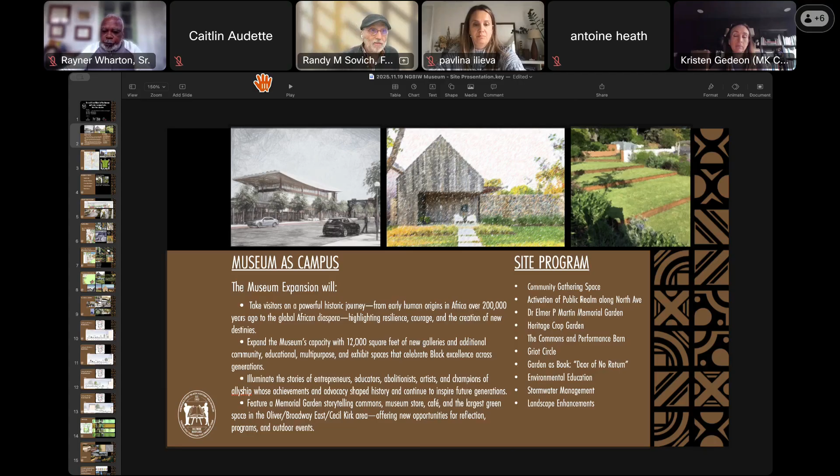The site is the largest green space in all of our Broadway Cecil area, other than the cemetery, and so we want to keep a lot of the property green and use it for storytelling for the museum purposes. The program is now being developed, and has all those things listed on the right as community program.

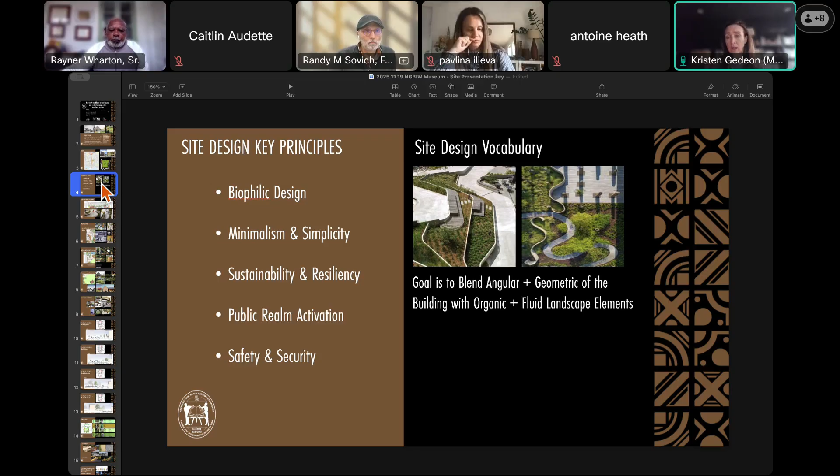So it is a blending of those two things—the more public and active spaces use that more angular type of design, and the more passive spaces on the edge of the site have those organic shapes introduced.

So we're just going to walk you through the different program elements, and then we'll do the big reveal in a couple of slides.

One thing we wanted to talk about first was obviously the public realm, and how our project interacts with what's happening on North Avenue. We really studied that in a couple of different ways. What we've done here is used those angular geometries to create large, welcoming pathways to the front entrance of our building.

So it doesn't feel like—it just feels like you're walking up a nice path to the entrance of our building. They are all ADA accessible, so no matter where you come from, you'll be able to get into our building. It's a 5% slope or less.

So we are thinking about the practical, but we're also thinking about how we activate the public realm and draw people to us. We've also set our building back a little bit, and there's landscaping in front of our building to help soften that and provide a nice grounding of the building to the site.

You can also see directly in front of our buildings, the street trees have actually been pulled back onto our site, and that's a visual cue. Usually you see street trees right along the street, but something special is happening here, so we've pulled those trees back so they're on the other side of the sidewalk.

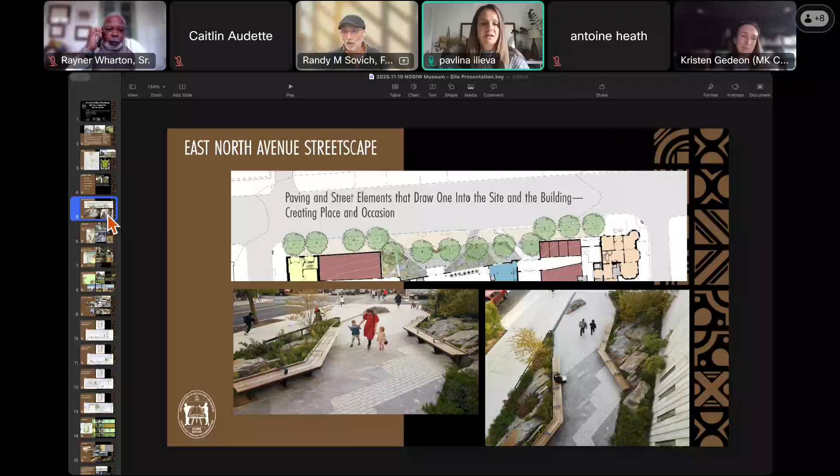But I need to understand in that next slide, because it's so zoomed in and cropped on that area of the ramps, where on the plan, on the large plan, is that? Is that towards the garden? Do you have an overall plan you can relate to?

We do. We would like to walk you through the different components of the site, and then we will show you the whole site, and then you will all be able to see how it all comes together.

And I don't want to wait to go through other things that don't make any sense. We want to have a general understanding of what areas you're showing us. So if you don't mind pulling up an overall plan, even later in your presentation, just point and say we're going to do this area, that area, and that area. That's going to help create a mental map for us to be able to follow along.

Thank you. We're showing you this area here. We're going to show you the garden, the Memorial Garden. We're going to show you the Heritage Garden, the Commons, and the Woodland Path.

Thank you so much, this is extremely helpful. In that order, I imagine, kind of the right, the left, and then below?

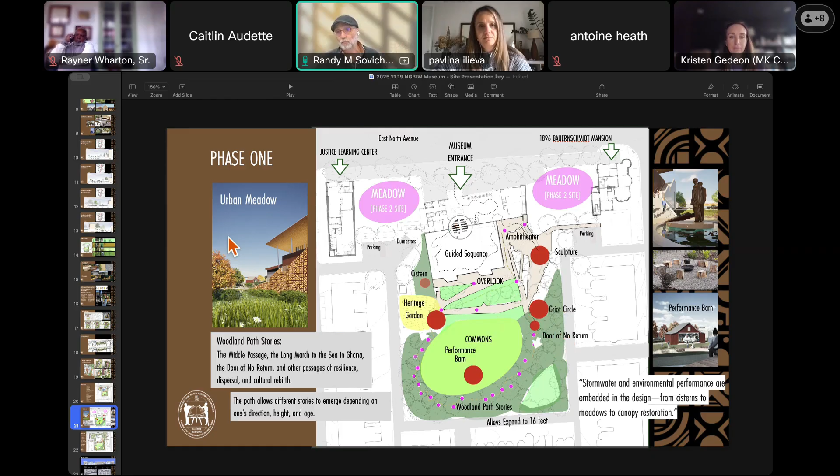So I don't know that I agree that you need to understand how it all comes together, if you just look at the different images first, which are inspirational and aspirational, things that we're also studying. You don't have to agree, I'm just telling you it doesn't make any sense.

And now that you've shown this little diagram, it starts to clarify things, so now we can follow the general areas of interest that you're taking us on. Thank you. Okay, no problem.

I could pull that up as a key, I think, somehow, but I don't know how to do it on this software. No, this was helpful, this is it, we get it. We now have a visual map of what are the areas we're going to talk about.

Thank you. Okay, do you want to cover anything else here, Kristen, before we move on? So this is a 3D massing of the garden, an idea for the garden as we're looking at it. These were inspirational images that Kristen had brought up, and we had worked together. A sculpture like this, Sojourner Truth, is something we would like to have.

The logo of the museum is two figures with a book, so we're looking at different ways a sculptor could do two figures with a book. Then the pathway down to the garden from the building is something we'll talk about in more detail.

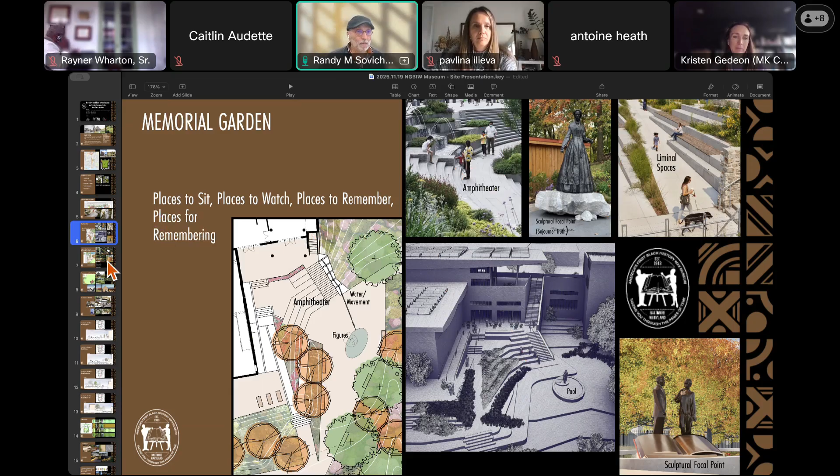But I think what Kristen wanted to cover here was the idea that there would be terracing coming from the building to the garden, how we get there and what might be in the garden, places to sit, places to watch, places to remember. I'll let Kristen do the next one.

Thank you. I'll be right back. I'm just going to get some water.

Okay, great. Kristen, just so I'm clear, the drawing on the left, is that your design? Yes, there's a rendered site plan. So on each drawing, the rendered site plan is your drawing, and all the other images are supporting the different components.

Yes, thank you. There was an idea that there would be an enlargement for that program area. This is a really exciting component of the project.

We are going to be doing some rainwater harvesting as part of our stormwater management plan, and we're actually going to be capturing it in an above-grade water structure. It's going to look kind of like a little silo.

That rainwater harvesting we will then use for what we're calling our heritage crop garden. There are maybe 8 to 10 crops that enslaved people brought with them from West Africa, and a lot of those crops actually grow here in the Mid-Atlantic.

So the idea is that in this heritage crop garden, we will be growing those types of crops so that they can talk about how those crops were brought over, how they really helped people survive, and how we continue to use those crops today.

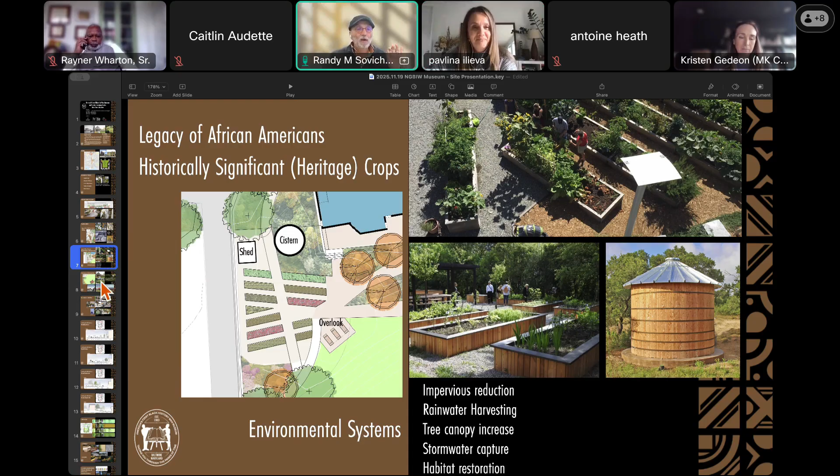One of the organizing features of this space is what we're calling the commons, a large open green space. A portion of it is sloped so that people will be able to sit on the side of it. It's meant to be this kind of large open green space in the project, in which the paths go around.

You can see that it's anchored by what we're calling our performance barn. This is going to be a 1.5-story structure that will have artists in residence perhaps in it. It may also serve as a movie night opportunity, but it's meant to be a small outdoor structure that will anchor that space and can be used for a number of different programming purposes as the museum evolves and has continuous programming opportunities.

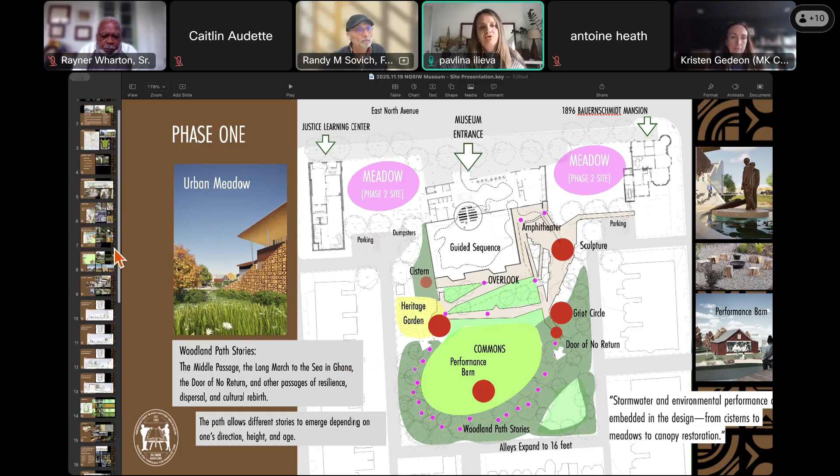Right, we were here, right before, and you were referring to this. I see at the top left corner is kind of where the garden is, and then the barn here, and I'm imagining the overlook is north of that structure, so that when we look at the render below, we're sitting at the overlook looking at the barn. Does that make sense? Correct. Okay, understood, thank you so much, I can follow the relationships now. Thank you, carry on please.

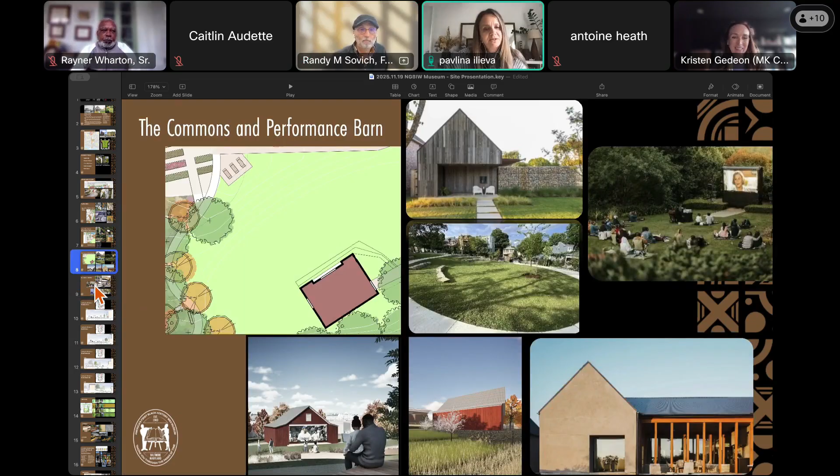Thanks, great, go ahead Kristen. Hi, thank you. So these are some site features, speaking to some of the materiality we're going to have, lots of natural wood, lots of Corten. Randy, do you want to say a little bit about the griot?

The griot is a storytelling area, and that's going to figure prominently. We're imagining maybe we'll have some tree stumps from the stump dump there so people can move around, but that's going to be a very dynamic space.

And then there is something known as the door of no return, and we want to have that program element and moment in the garden. We're doing it almost like a secret, so that's also along the pathway, a moment where we can use it to tell the story in the landscape.

There will also be a water feature, probably in the Memorial Garden area. Water is a very important element in African American culture, so we wanted to make sure that was incorporated. It's also a nice white noise to have in the background when you're in the city. The water feature is integrated into the Memorial Garden area and takes advantage of the grade change in that area.

These are some sections that we did through the site. I think these really help to explain some of the grade changes and how our site specifically relates to the public realm. The first section is through North Avenue and through the main entrance of the building, so you get a sense of exactly how the sidewalk, the right-of-way, and the landscaped area relate to how people are entering the building.

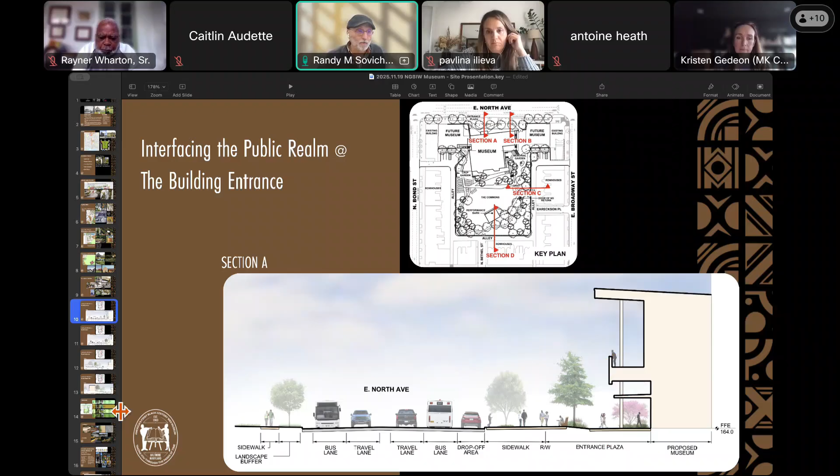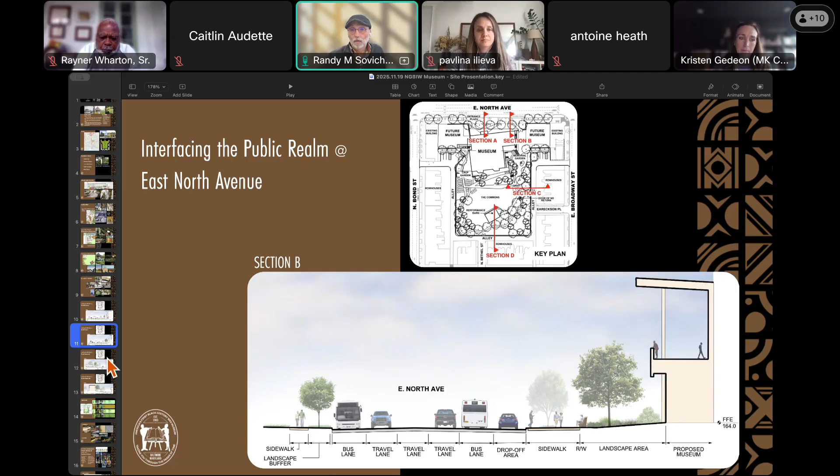And then the last section is through the bottom of the site, and that takes into account the barn. So you can get a sense of the massing of that barn as it relates to some of the grade change happening at that part of the site. You can also get a sense of how that woodland walking path is interwoven into the woodland edge that's buffering our site and providing nice green space.

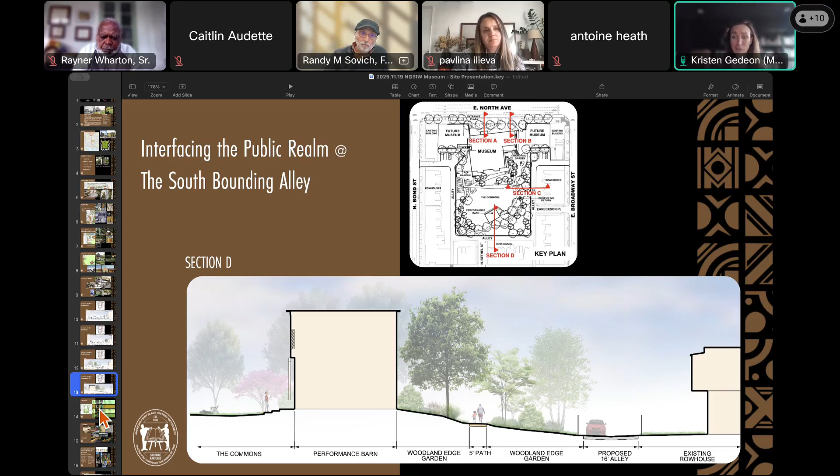We want to talk about site materials - again, very natural materials. We're thinking about lighting and other things that need to be layered in. We're trying to use organic or local materials because we don't want a lot of concrete sidewalk. We'd like soft pathways, but they need to be ADA accessible. For the woodland path walkway, we're looking at flexi-pave or something similar - trying to get away from asphalt or concrete and use materials that feel softer and more natural but are still easy to maintain. These are all referential images.

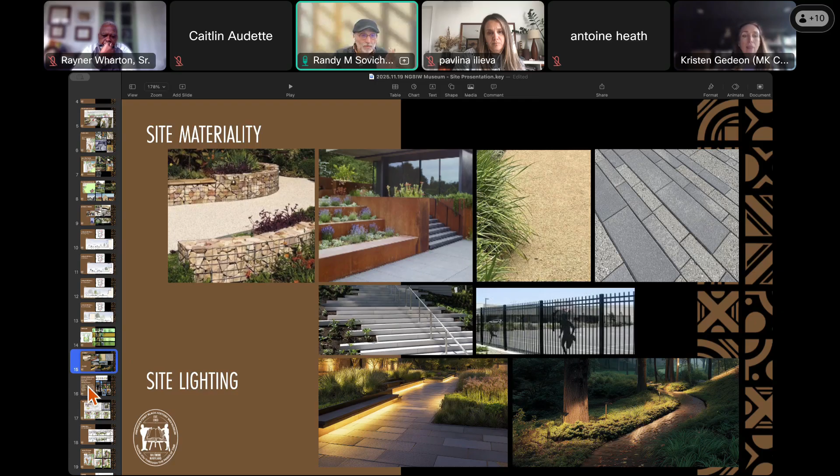And the garden - we're seeing the garden as a book of storytelling. So there will be ways to walk through the garden, and depending on which way you go, it might be a different story. There may also be elements at different heights for stories for different people at different heights.

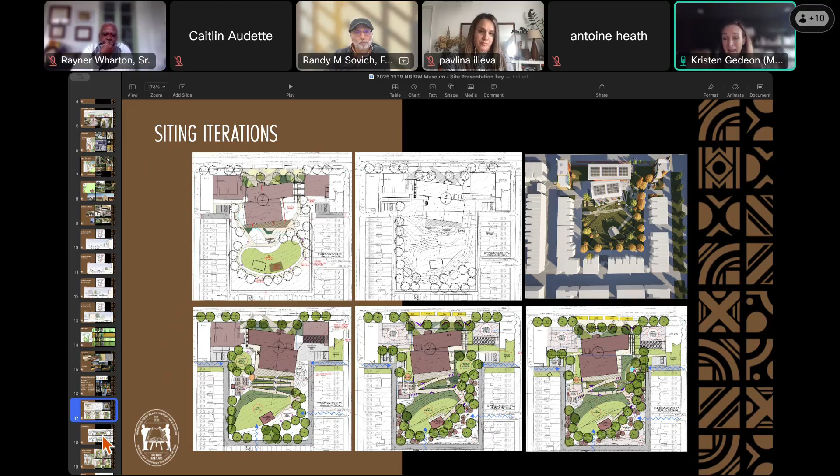This was just to show some of the work we've done. We've clearly worked through a lot of different layouts and configurations to get where we are. I don't want to go through every single one, but just to show some of our process on how we got from point A to point Z, where we are today.

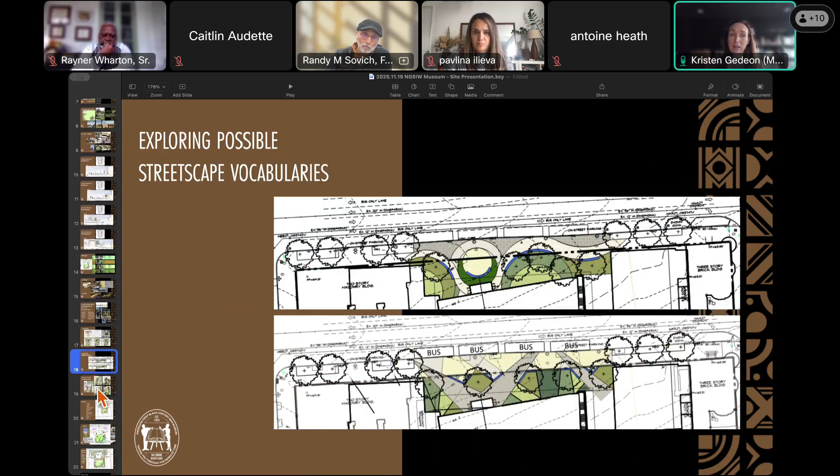This was also just to show some of our work. We did explore a couple of different options for the layout on North Avenue, and we landed on the more angular language for the layout, but wanted to show our work here if there are any questions.

So this is our master plan, and you can see all of the different elements that have gone into this garden. It may look simple and minimalist, but there's a lot of different programming that has gone into it, which we've hopefully integrated in a way that feels thoughtful and intentional.

Can you please spend two minutes walking us through this plan, so we can match up some of the things from earlier in the presentation, specifically the areas of enlargement, and talk about how these different pieces are conceived and related together. Thank you.

So the existing fire station is here, and the existing mansion is here, just for reference. The new building is here. Future phases will link the whole thing together, and we'll talk a little bit about what happens in the first phase.

If you're coming to the Justice Center, you would come here. If you're coming to the Bauernschmidt Mansion for a convention, conferences, special exhibits, or a wedding reception, you could come here. When you come into the building, there's a large lobby space because they get a lot of people arriving by bus - buses will park along the street here.

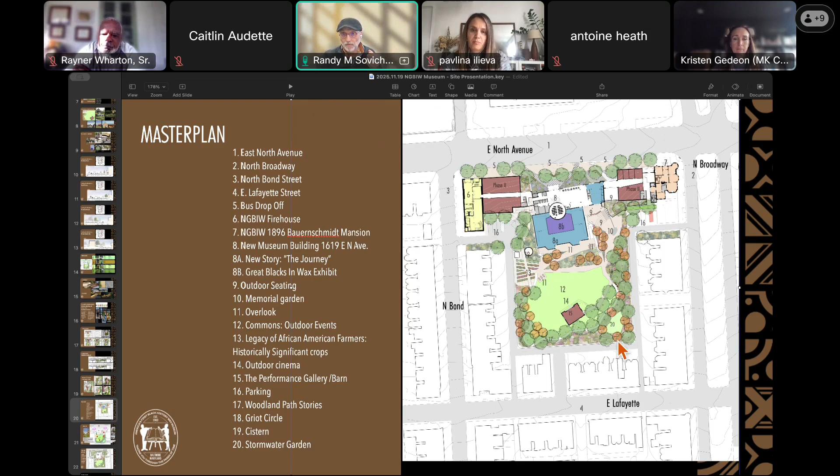I think we talked about this already. Parking for the buses is along the street here. Visitors parking is across the street in a common parking lot. There is service parking planned on either side here and here, and there would be a fence all around the property that would go entirely around that section there, not including the parking.

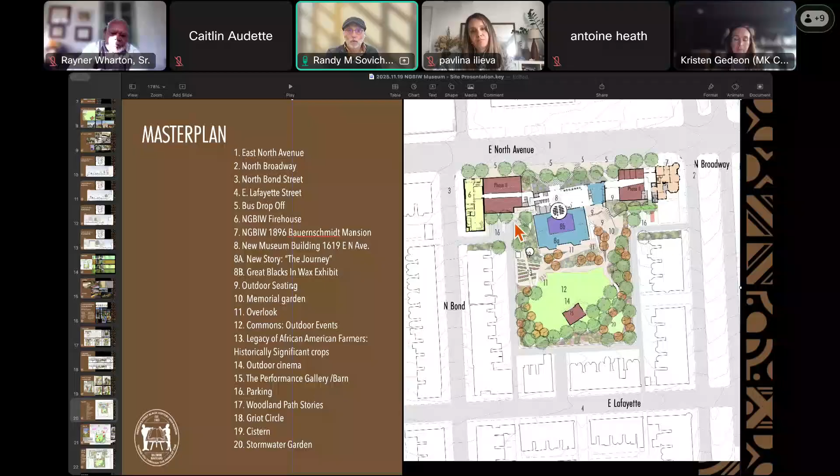Dumpsters location is in this corner of the property, and you can see there'll be a walk through here. There'll be a small ramp to get you from this parking lot up into the building area here.

And we're still working on the programs for these future phases. This probably will be a youth program with maybe even a fitness space in it, as we figure how it works with the whole overall look. The barn is designed so that it can have movies as well that could take place there.

Phase one, there won't be buildings in these two areas, so we'll have the three separate buildings.

The phase one plan is rendered here, with the landscape really being a storytelling element to the whole process. So it's a building, it's an urban building, and it's a building in a park.

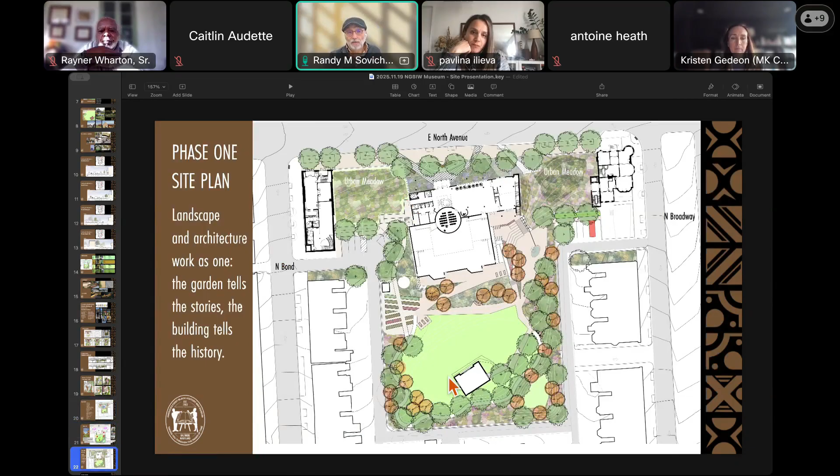Master plan, phasing diagram, the massing of the building. These are the three elements that you'll have in the first phase.

Rayner, I think, is working with a separate architect on renovating the Bauernschmidt Mansion, and there's funds available through the Maryland Historical Trust, and the firehouse already has a set of documents for renovation that are ready for permit, but won't be able to happen until this project is underway.

So here's kind of the massing along the street, here's kind of how we see it elevating. There's some datum lines that carry through, and a lightness on the second floor compared to maybe some more closure on the first floor here.

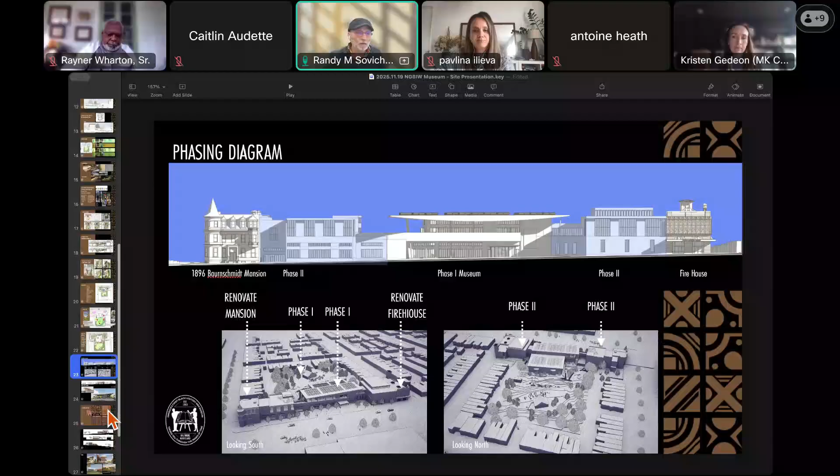And I'll just keep walking through. So phase one will have the buildings on either side, and the new building. Here's a view looking to the south, from the northeast. Here's a view looking directly across the street.

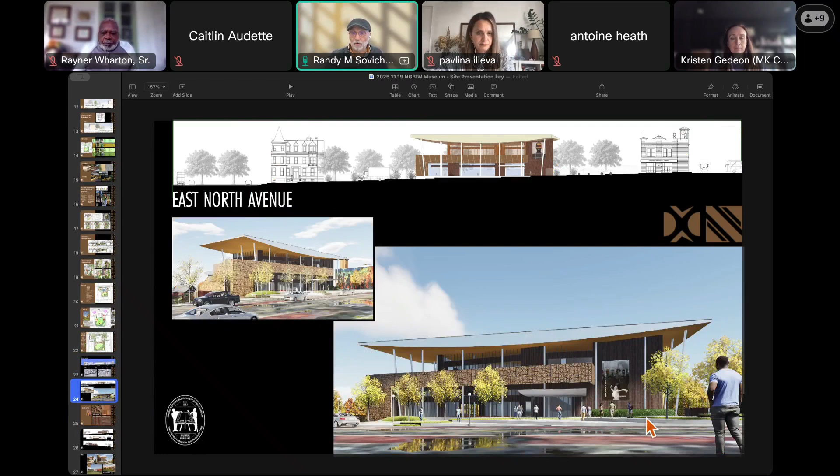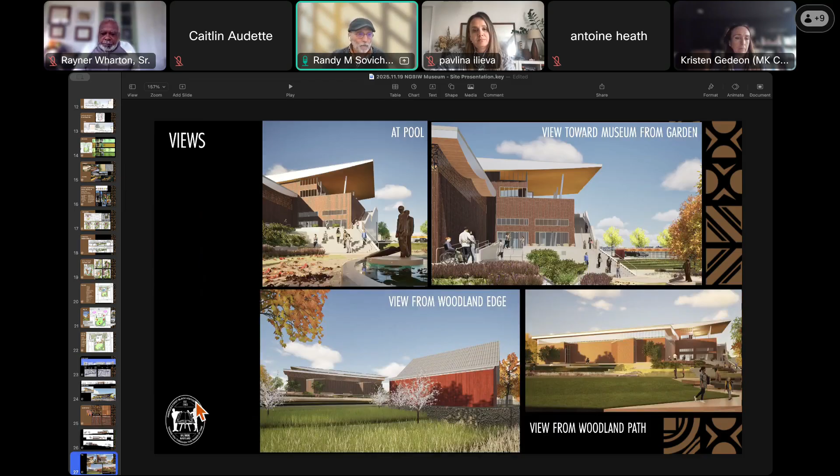And that is it. I'm really sorry that we couldn't have Dr. Martin here; she had some final comments to make.

I don't know if she's here now. She was able to join via phone. I elevated her to panelist. Oh, good. Okay, Dr. Martin, did you want to have some final thoughts since we missed you at the beginning?

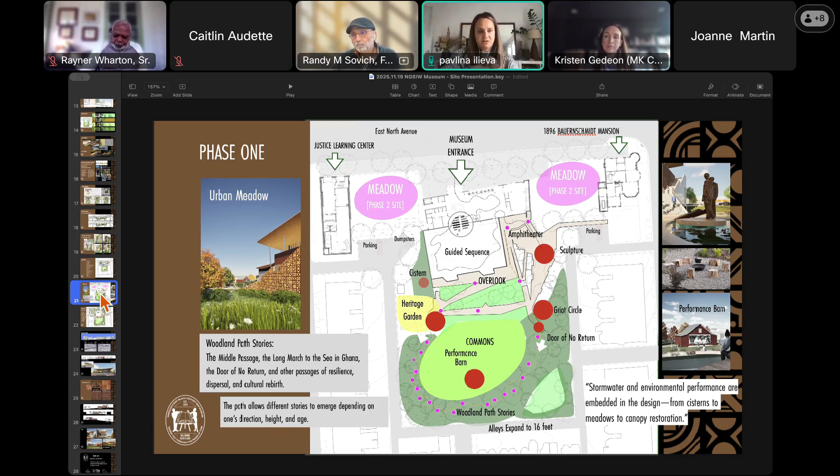We typically see a few very high-level diagrams that create an understanding of the overall approach, the big idea, the general gist of the story. As we move through the various drawings, they zoom in towards the end, in greater detail, taking us into some of these decisions. I think in this case we managed to stitch them up along the way. I'll give the rest of this segment to Q&A, for questions from the panel in case there's something they want to clarify.

Before we do that, if we can jump very quickly to those few slides of the enlargements before we saw the overall plan, I want to make sure we appreciate the images that are there, and understand what's part of the design and what's referential.

So this is an enlargement we included of the front of the building with some examples of this angular geometry. If we can go to the next one, please.

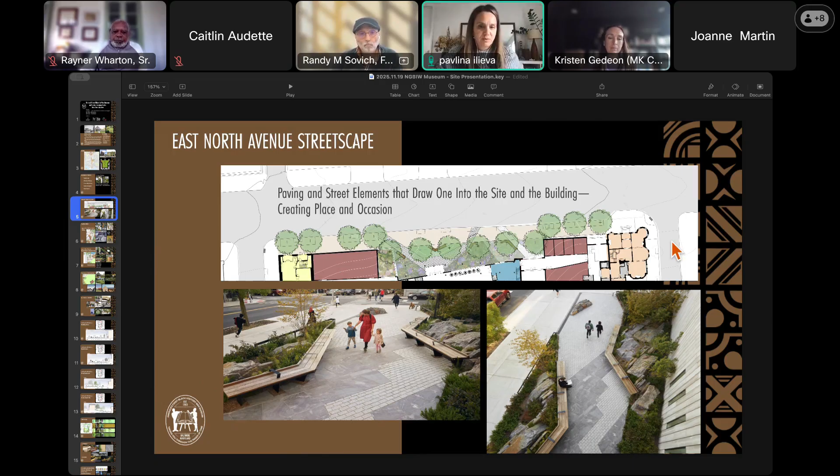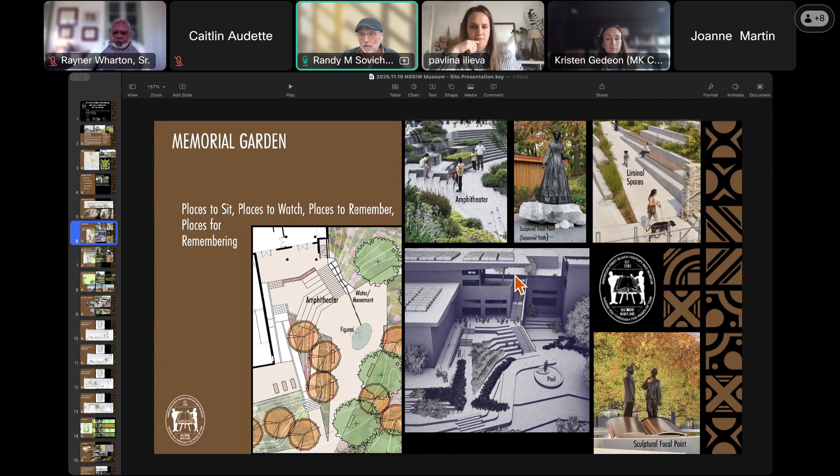Can I ask, that Maryland room you were mentioning above, is that the same section we saw with that canopy and open space? But it was kind of facing the street? This is facing the street, and it faces straight through, so this area is open all the way through. Understood, so it's like an open air but covered space that looks into the street. Okay, understood, thank you so much.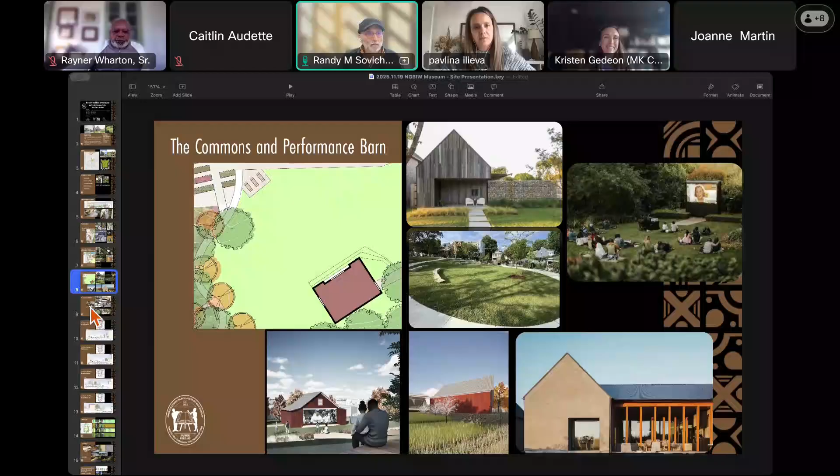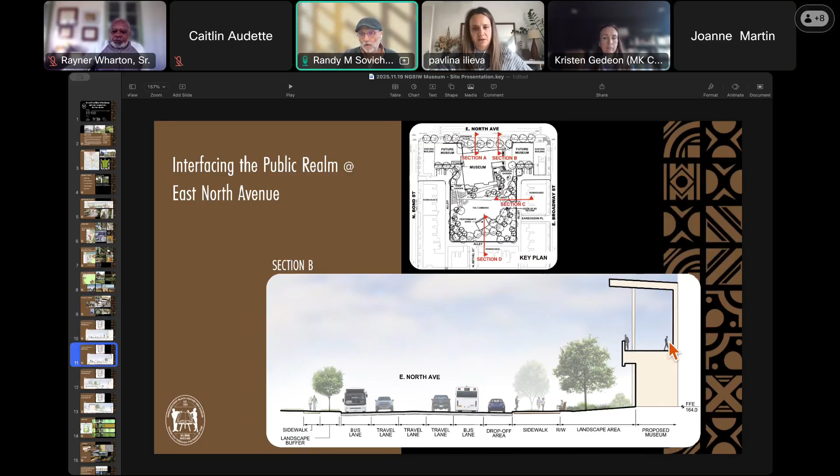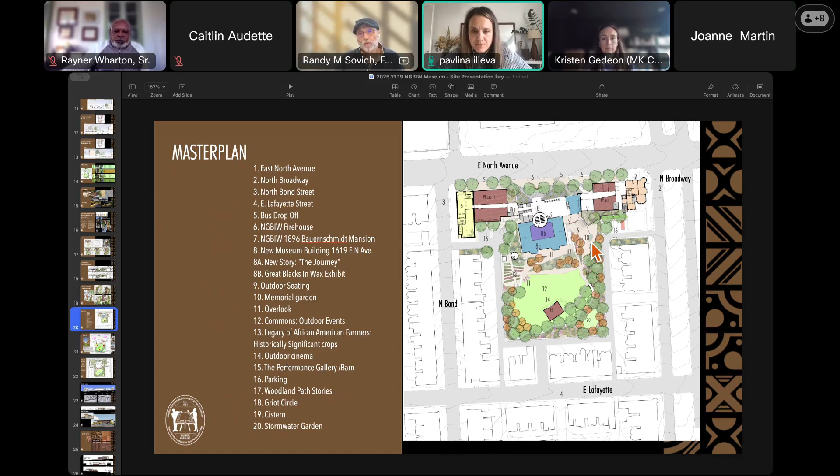And then there was a plan of the building that explained where the lobby is and where the exhibit space is. Is that the only drawing we have that explains the building organization and layout? Yeah. And are there 2 stories to the building? Is it on 1 story? There's a second floor that's in this area right here.

And what's there? That's the Maryland room and bathrooms and support, so it's basically a repeat, only over that volume. So the exhibit space is just 1 story? The exhibit space is just a 1-story exhibit space. It's a tall space, 20 feet high. Can you reference it? It's only over this.

Sorry, can you reference that in your elevations now that we understand what the masses are? There's a 2-story mass and a tall 1-story mass. So this is the front. So this is the Maryland room here. And there's just basically bathrooms, then elevator and connection to the future phase.

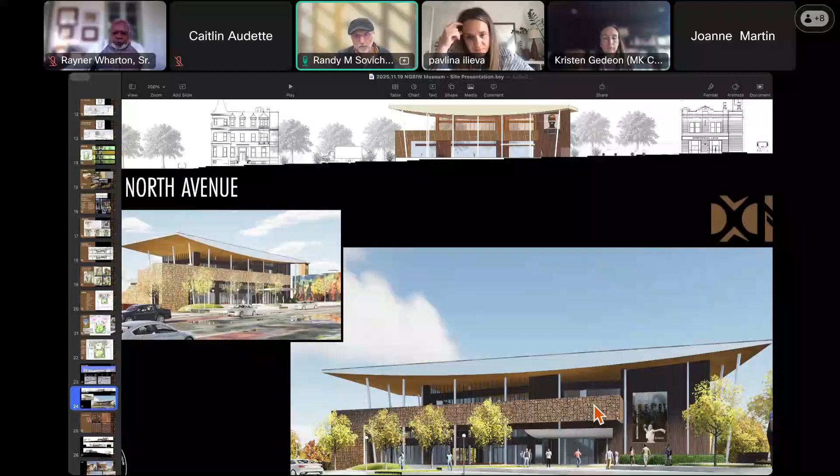So a lot of open space up here. There is a balcony that is more or less perpendicular to the street here, or parallel to the street. So this picks up the street edge. In other words, right here, this is picking up the street edge.

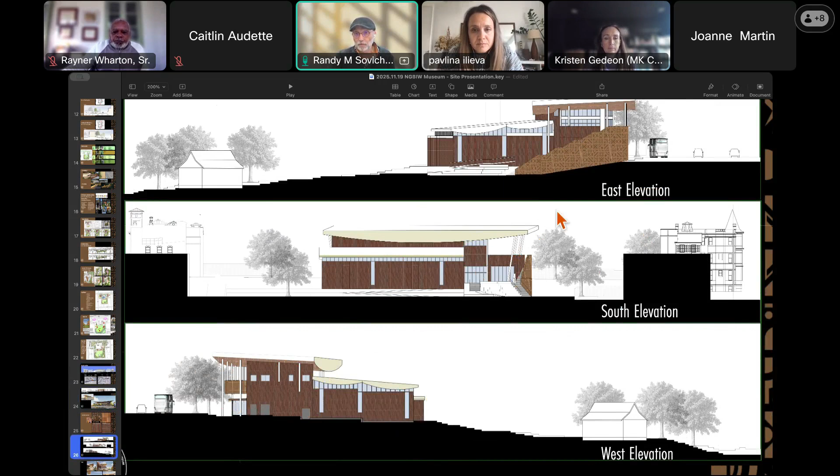And then if you go to the back of the building, this is the gallery space and then the museum Maryland room and the museum common space here. So as you step down, you've got the gallery space, and then you've got the upper floor of the museum and then future expansion on either side.

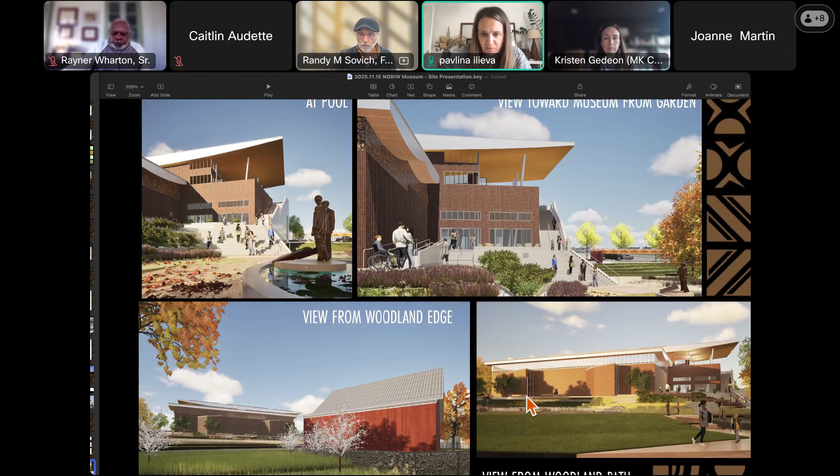So from this view here, you see the back is the museum space, and then there's the Maryland room, and that's just the building spilling down here. So there's the amphitheater space on the right, and that goes into the circle down with the statue. And then there's the ramp, the overlook is right there in front of the building. Overlook is along here. And then this, the gentleman, great right lawn, here is the guy that you were seeing looking out at the barn.

That is him. And there's no trees there? There's no canopy, or are they removed just for the render? They're just removed so you can see them. Okay. And then the other one is to the left. We're standing lower into the landscape with the barn in the foreground, and then the building is up the hill.

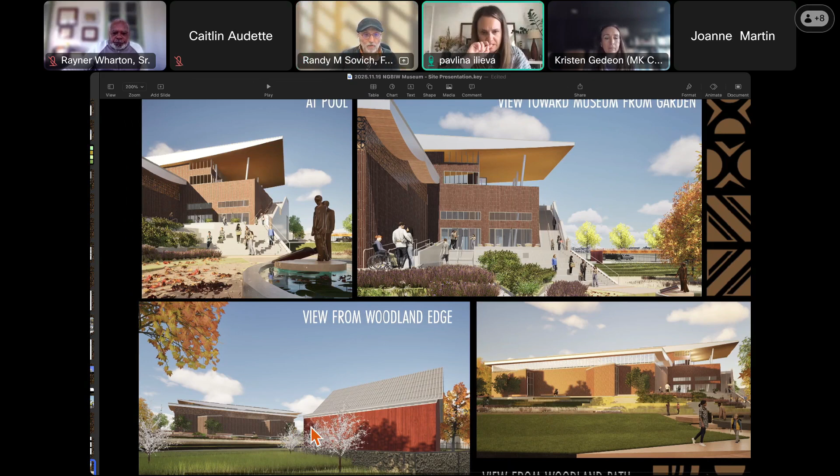So great lawn overlook the back of the building. And this, as you recall, that section that Kristen created showed how much grade change there really is there. Yeah, dropping into the alley.

Okay, and I think it was just one more render maybe that we can look at. The top right, where are we there? This is the Maryland room. This is the stair coming down to the fountain.

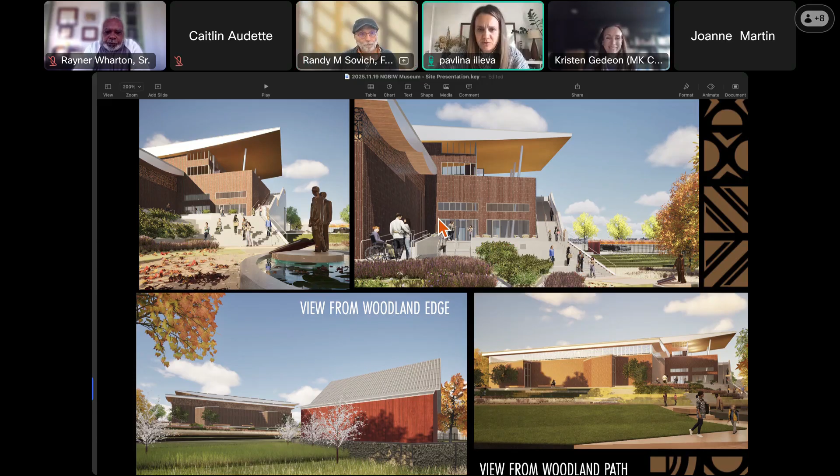This is the meadow space here, and then this is the walkways that take you down. So you could step down, you could wander down through planting. These steps become graded landscape as you round the turn. I see, it's really the same space as the one on the left. It's just it looks so exposed on the right, but I think it's because it doesn't have the addition.

This is phase one. Right, it doesn't, so it doesn't show the firehouse. You don't have a continuous street wall there. We'll have a fence there and that's a fence, the fence and the meadow. And so then from there, people will be able to get views into this garden as they walk along the street. It will be very transparent and open from the street.

Okay, understood. Thank you so much. I think it was very helpful to take the time and walk through these.

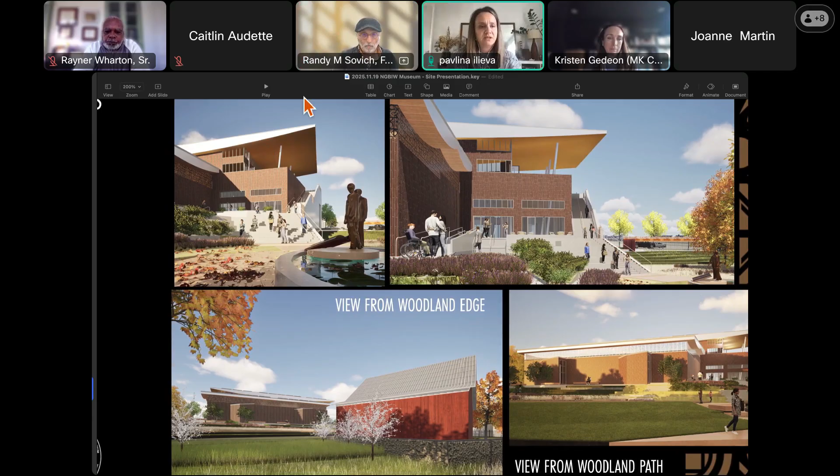We do see a lot of projects all the time, and it's really helpful to be able to follow along and take your time explaining and pointing to the different things. It helps us appreciate the work rather than missing it. If a slide is only on screen for 10 seconds and the landscape is color coded with a lot of labels, there's not enough time to read all of it. I think it's really helpful to hear it from you, which is why we're in a live presentation - you get the opportunity to tell us the story.

The other thing I would say is it's really helpful to separate reference images from your own work. In general, reference images should always be credited. You're using other people's work on those pages, and especially when you create ambiguities where it might read as your own work, that's when it becomes problematic. You should always be clear about what's your work and what's somebody else's work. That will also help read the slides and know what you've designed versus what inspired you. Thank you so much.

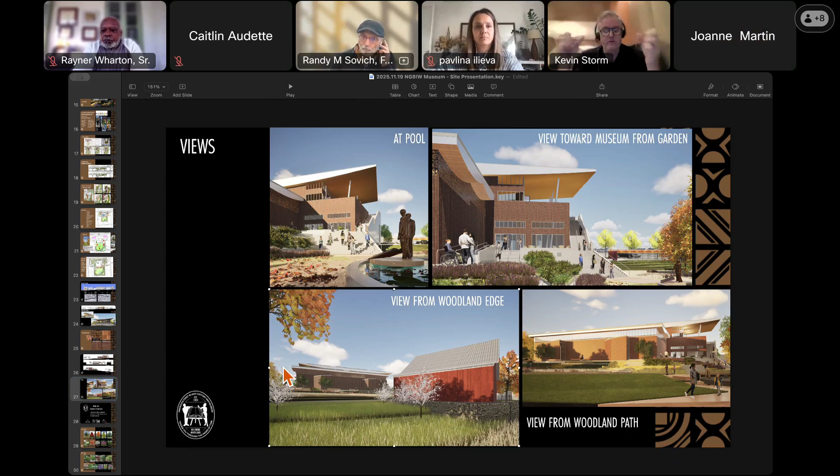I agree, I had a completely disorienting experience trying to follow this presentation. It kind of left me with a list of 100 questions, so I'm not going to go through the whole list, but I want to step back and ask a few fundamental questions I just didn't understand. I do want to say the mission of the museum is so inspiring, and I loved hearing the director's remarks at the end. Thank you for that. But that's a very different bucket of inspiration and commentary than what we're really focused on right here.

I think we're interested in how this place meets its urban edges, sits within the neighborhood, contributes to its neighbors, and how it deals with the basic functionalities - do people get in and out, how does service get in and out, where's the loading dock, where are people coming on bikes or cars or walking. I think you began to address the alley a bit, but just having site plans that show that is like the first fundamental thing we need to see.

So maybe to that point, I feel like I saw a site plan where there were more buildings on the site, and then it looks like in your final plan you're tearing some buildings down. Could you clarify - first of all, how many buildings are being torn down for the master plan, and why are they being torn down? That's the first question.

Only two row houses are being torn down. This is the master plan. In the first phase, these two buildings in brown and that circulation in white next to them will not be built until a later phase. They're future phases - in the future phase these will be meadows until we can build the future building.

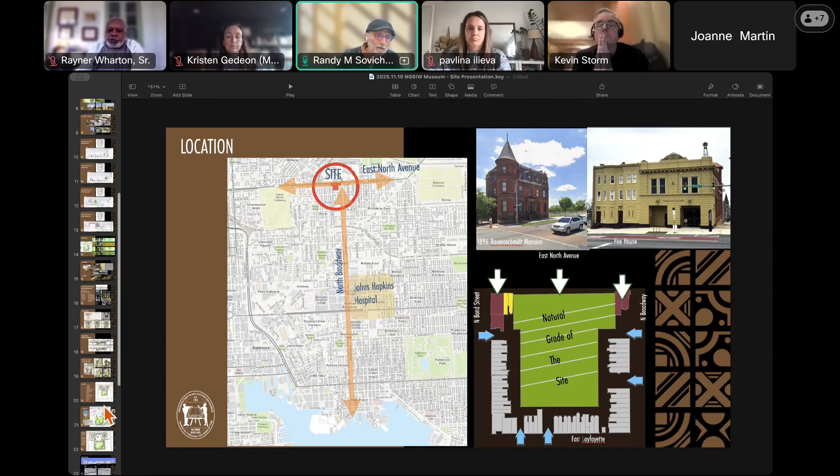They could be there until another time. They were planned to be torn down as part of another project that wouldn't have necessarily gone through this review process. Okay, well, that's not a good answer - it needs to go through. I think as someone who works in sensitive historic settings and neighborhoods, if you're tearing something down, it's like the doctor saying first do no harm.

I think the community, or in general, especially when there are two buildings that would arguably contribute to the historic character of an overall neighborhood, while they may not be rising to the level of national landmarks themselves, I think it's just important to explain why they're being torn down. And especially in the context of this museum, there's an entire history of urban renewal where supposedly blighted or slum neighborhoods, which were often predominantly African American, were torn down just because they weren't quite up to date.

There was this whole vibrancy, authenticity, and rich history of neighbors that was just wiped to the ground. So for a museum with your particular mission to come in and tear down buildings, leaving them as quote unquote urban meadows, it almost sounds like a rehash, in some ironic way, of urban renewal. I know I'm exaggerating a bit, but I think these are very important decisions, and they should be explained in a thoughtful way.

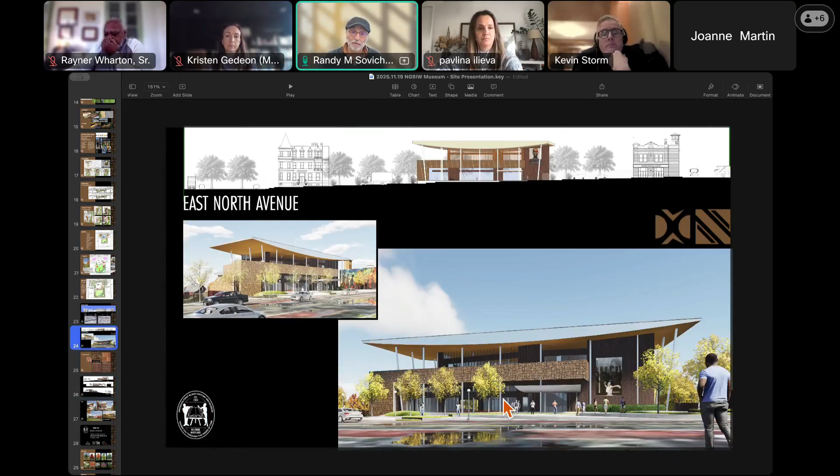It's a subtle angle, but it allows us to have an overhang here, so we have a covered entrance from the street. From the streetscape, we end up with a covered area in the front of the building, and even all the way into this side. And there's a transparency that happens with the building as well.

Not sure if that's enough of an answer.

No, it is. There's a strong geometry from the ground that is orienting this building, strengthening and setting the shape of the building. So what happens is it comes from the ground, and then it comes back up and meets the city line, as opposed to mindlessly following the line of the street.

Got it. Okay. No, it's actually really helpful to hear. Thank you for that explanation. Yeah, it's not an arbitrary angle like on Charles Street, where we just...

And then last question, I promise. Can you just describe where loading happens, and then describe those 2 little parking lots? Is that for staff? Is any of that for visitors?

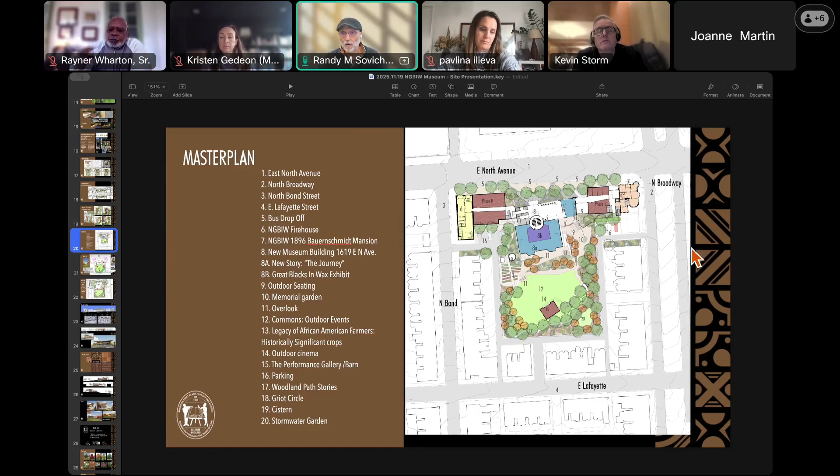It's all staff. Handicap bathrooms and handicap parking are here for people coming in by vehicle who have a handicap space. The major parking is already shared, under contract with a neighbor. And then there's parking here.

It's all off-site, and here we have parking and loading for below this future phase. The site is dropping in this direction dramatically as well, so our floor here at ground level would be at the same level as the mansion. We would be able to carry straight through into the building here, but we would have a handicap ramp and elevator connecting in.

You presumably bring in large changing exhibits or catering — where does that happen? It comes in and usually turns around with a van, usually just with a van right now. Everything would be done with a van. So access would be here or here, no large trucks.

The original scheme done by Davis Brody Bond had parking back here and all the loading and access coming in underneath the building. But we wanted to keep as much of this site green as possible, able to be used for other public events and festivals that happen in the community, sometimes on the street. So this space becomes this green space here.

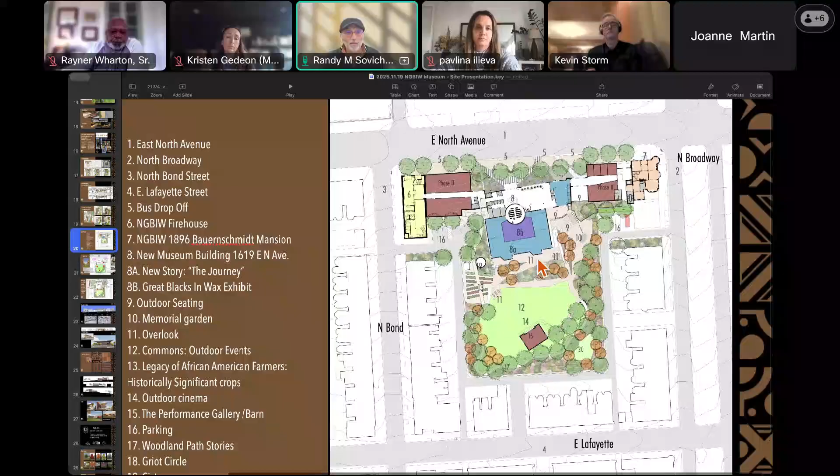And the meadow space — I take issue with calling it just an urban meadow. We were just at the Calder Museum in Philadelphia, and there's a spectacularly beautiful urban meadow happening right on Benjamin Franklin Parkway. I don't see why we can't have something beautifully planted with flowers, as Kristen's been imagining here. I don't think it has to be just a lawn that's getting mowed.

It can be — we had some photos that didn't get put into the presentation. I mean, it's a tremendous area, a big area that needs to be maintained and planted, and it's also behind a fence, it sounds like. It is, yeah. I think there's a similar... a lot of...

If you should look at the Calder Museum plans, because it's a wonderful kind of thing that can happen, and that is much smaller than what's happening at the Calder Museum. Okay, fair enough. It's a small area of a few row houses, but I take your comments.

We'll take them into consideration. All right, those are all my questions. Thanks, Pavlina. Thank you. Thank you, Kevin. Osborne, what are your questions for the team?

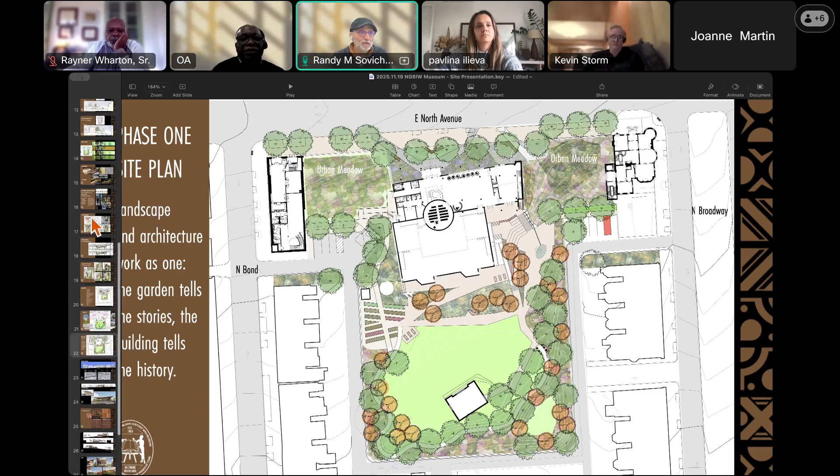Sure, just a few. What's across the street on North Avenue? What does that complex really look like? I'm sorry, we did a presentation with all of that earlier, so I didn't repeat it. But there is a one-level shopping center across the street. Got it, okay.

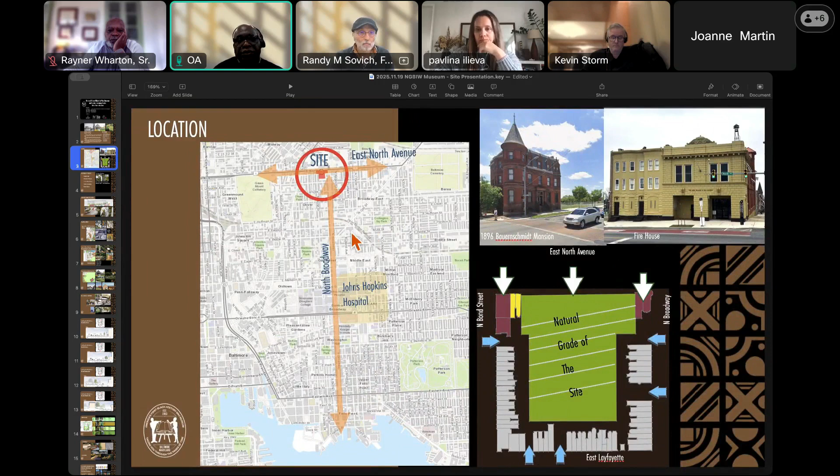And then my second question is, so you're introducing community-related use, understandably, but it seems as though quite a bit of the functions are going to occur outdoors. Aside from the alley separating the back side of many of these, seems like townhomes, are you concerned about noise, use, music, etc.? What are you thinking about in terms of mitigating that sort of interaction, that immediacy to the backyards of many of these homes?

That's a very good question. The people who live in the houses will be concerned about the sounds coming from the garden and the events there, as well as the people in the museum being concerned about the sounds in reverse, and that is the definition of being good neighbors, I think.

I don't mean to build a wall. No, it's okay, it's a good question. We thought about it. Some of those houses are not in very good shape. But I moved to Baltimore in 1979 and I saw them building Harborplace, and I looked across the harbor and said, look at the backs of those row houses there. They look terrible on Federal Hill.

But now people have changed what they do, because of the context. So the people who are in these homes will have a wonderful amenity that they can look out over, and hopefully there'll be a feeling of community.

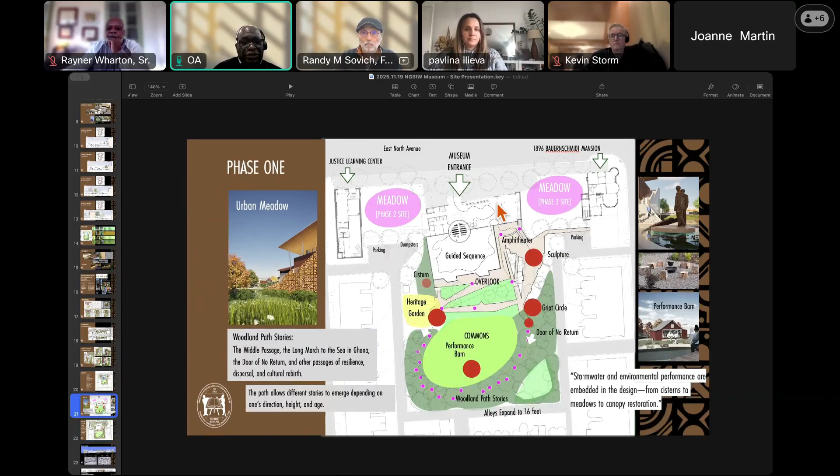Okay, and then related to that, we've seen a lot in terms of presentation related to everything that's outdoors, and I think Pavlina kind of alluded to this. We haven't really seen much related to the programming other than just some references here and there to understand the relationships between outdoors and indoors. My immediate feeling is the museum, it's really Blacks in Wax, and I feel as if I got a tour on a landscape project through some kind of a botanical garden.

So my question then is, what happens to all of these outdoor spaces and uses during inclement weather in the wintertime? What happens, does the museum close? How does it work, how does it function? Well, the museum still works. The museum is open year round. The garden is a supplement to the whole process.

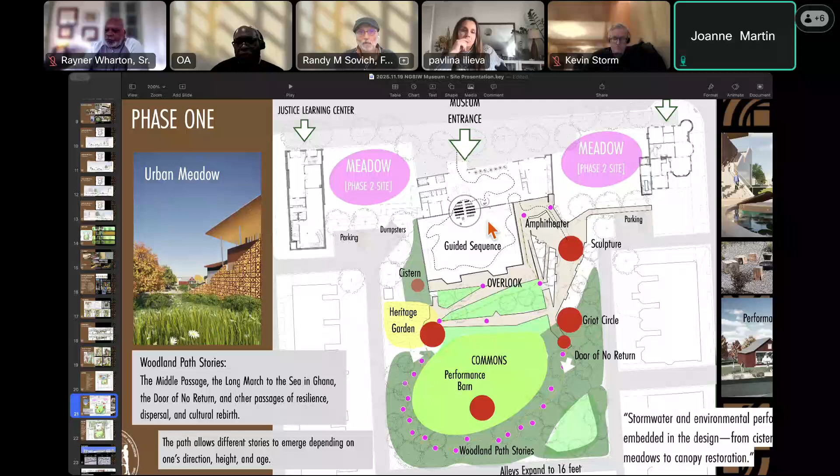May I address that a little? Absolutely, Dr. Martin. The story is within the museum. We're talking about 250,000 years of history, where we tell 5,000 now. We're talking about a story that begins with Africa, the birthplace of humankind. We're talking about taking visitors on a journey, and that's the way we refer to it.

A journey that will take us through African kingdoms and empires and the kind of history that you don't get. We're talking about a museum that will not start the story in slavery, as many museums do. So again, going back to prehistoric Africa and bringing the visitor through a powerful journey, with a compendium of wax figures that help to tell the story as well.

Inside the museum, the garden space and so forth are designed to complement what is going on in the museum, to tell a story, weather permitting, but again focusing on the journey, focusing on galleries that help us understand our contributions to the medical profession, or galleries that help us tell through our Justice Learning Center. But again, inside the museum.

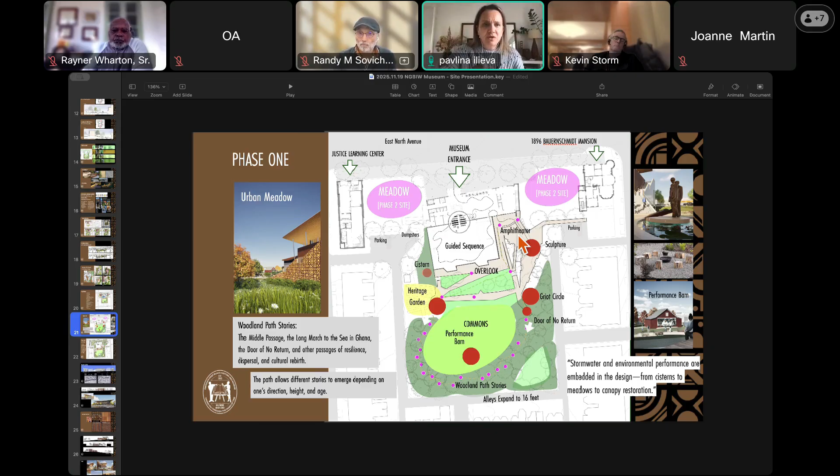I say that because when you showed me the renderings of that area, there was this really unexpected scale of the third dimension that I experienced in 3D that isn't visible in plan here. In the plan, and even in some of the enlarged drawings you showed, it felt a lot more intimate. It felt like you're coming out of the building into this cascading plaza of geometries, with a focal point there. In this plan, it felt, maybe because of the vegetation, contained and defined, like you're in a space. And all of a sudden, when we looked at the 3D, the building looked really large.

The stairs looked very long and steep, and then there was the flat meadow, like the image on the right. There just wasn't that connection, and it might just be a function of these images modeling the building without really modeling the landscape and vegetation yet. But this feels grand and big versus a flat land on the other side, whereas the site plan looks cradled and defined, like you're in a courtyard scenario.

I think some of that would be helpful as it continues to develop, that the study happens between the 2D and the 3D, incorporating the landscape as designed, even if it's just placeholder trees, but ones that create walls of a space, softer walls, but walls nonetheless, that start to contain things. Right now, I'm not sure that coming off of this big stair and looking into the meadow and the back fence is really giving you that sense of being in a space. It feels very open, eroded, and kind of undifferentiated.

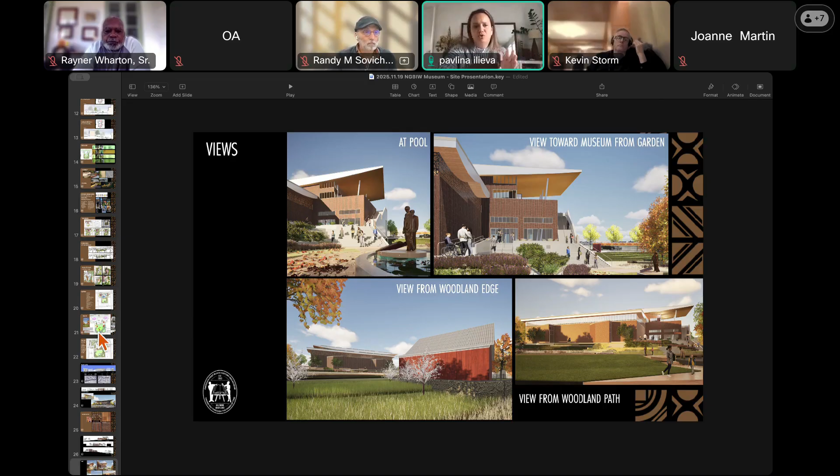There's a label for it in the site plan, but when somebody's there, there's just a lot of things happening. So I buy it. I think the site plan definition feels right now a lot more convincing in terms of space-making than the 3D. I think you just have some work to do in making the two really sync and talk to each other. That would really be the next step in a lot of these moments: if you've found the shapes you want to work with, now it has to be about how the space feels and how people will use it, letting that continue the shaping of what's there.

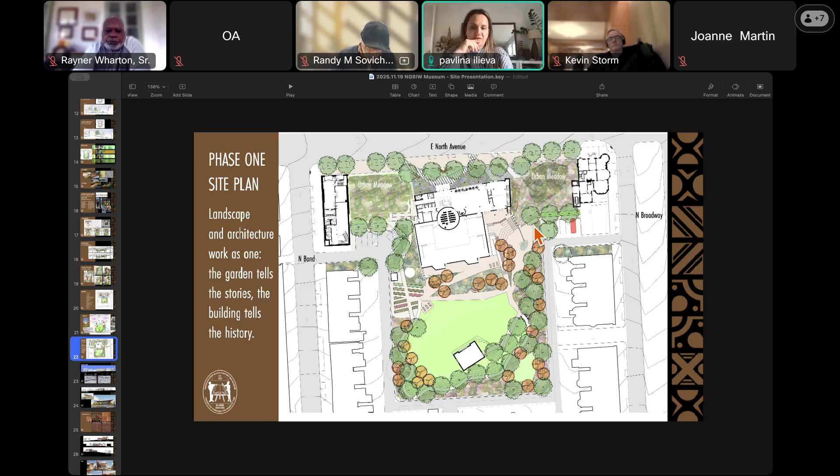The part that I have probably the greatest issue with is the front, the North Avenue edge of the site. I think others have mentioned it, and you'll probably hear it in a few different ways. If you could please hold on to the site plan for a little bit longer, so I can refer to a few things. Thank you.

The difficulty is that there are two possible additions that aren't happening yet. So for the time being, as conceived, the site feels fragmented. It's a full city block, with a smaller building on each end and a larger one in the middle. How do we make it feel like the missing pieces are not missing teeth, not vacancies, but intentional, part of this experience? I think that would be the hardest thing to do, and to do it without, like Osborne said, planting a bunch of trees you're just going to tear down, or even an expensive fence and things like that.

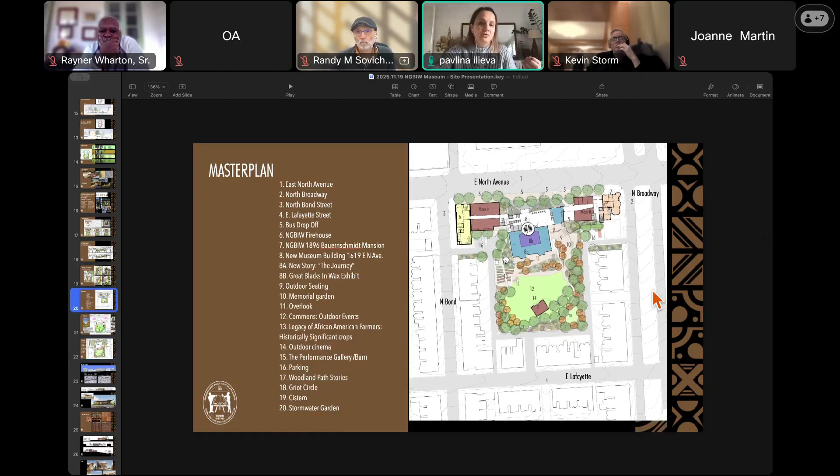I look forward to seeing this developed in a way where the urban meadows, as beautiful as you're envisioning them and as I know they can be, aren't an afterthought of what to do with these vacant sites, but are part of your original idea. They'd have to be a low investment solution integrated with everything else happening. Because when you showed us the plan with the additions and described the drop-off plaza, things made sense. Then you show this and suddenly it doesn't. So I think there's a moment where you can design the first phase, start there, and make sure that plaza doesn't feel separate from the meadows, but rather a continuous space.

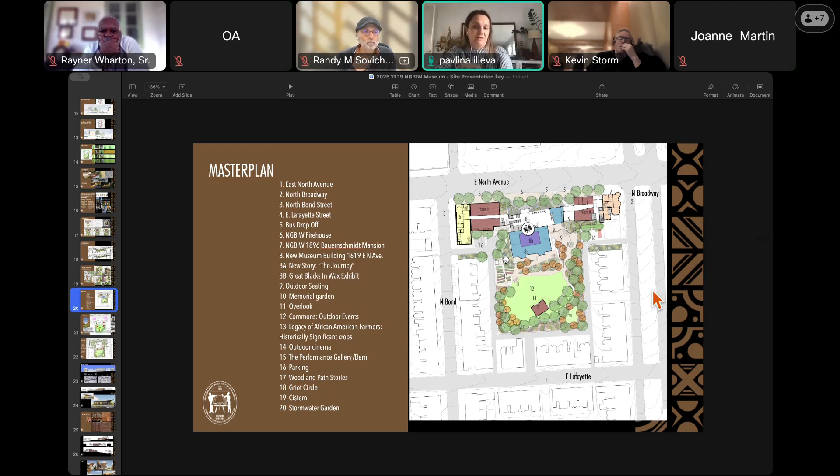Just the way the fences work and the way the approach works, do they blend, do they morph into each other? And then say, okay, at some point these buildings will come and the meadows will disappear, and this is what the result will be. I think it's important that phase one is designed in a way that feels intentional also.

If we could go back to the zoomed in version, or even this one. The only other issue I have with this front area is that the planning of it feels very arbitrary to me, because we talked even last time at the presentation about how you position the new building. I remember maybe at that time you shared some early studies where it was a little more to the left and connected. I don't know if you studied it being a little more to the right, but the question remains: where is that building relative to the existing ones and even to future additions? I guess we didn't see a study that rationalizes, or explains, why you chose this particular location with that particular angle. It's really hard to understand that this is the best solution for the site, because we just don't see the rationale behind it.

I can understand maybe why you're angling it. I can probably understand why the two volumes are shaped the way they are and sort of sliding. But again, there's no information. There's nothing that really helps us come to terms with what we're seeing.

I am mostly concerned with the fact that the building is so fragmented from the other two, and then the whole street edge is also fragmented. And then there's these diagonal paving things that I don't think go anywhere. I see that one goes to where there would have been a tree pit, another goes to where the other tree pit is. I see that you're looking at images of projects that do these angles and things like that, but they're more intentional. More often than not, they connect different things or use different sight lines. They're not just shapes. It seems to me there's a lot of shapes drawn here, but they don't seem to necessarily do anything or connect anything. They're just visuals. And I know they're trying to bring people to the entry, but bring them from where? From the edge of the planted area?

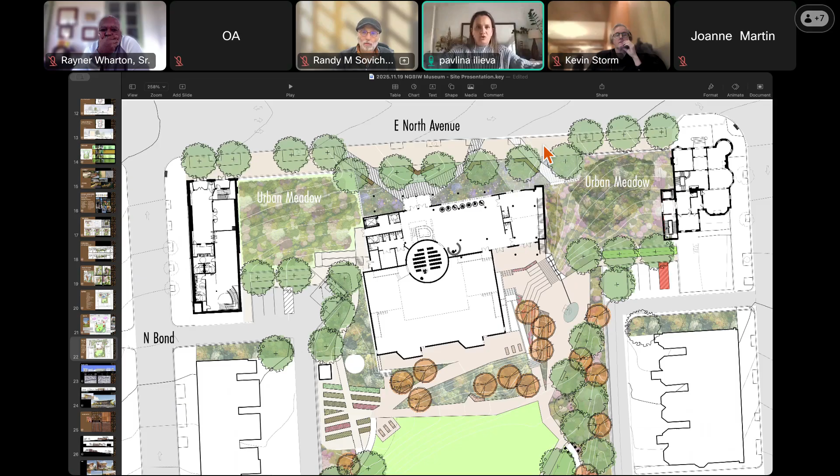I buy the whole idea of pushing it back. I buy the idea of angling it. But to what end, and how does it even connect to anything, is completely unclear. Right now there's two small buildings that anchor the corners, but there's no connection between them, or the corners of the building, or that particular location, or what happens in between, or how one even ends up at that door. It seems like it's designed for someone to just unload that bus and get in the front door, which is okay.

It's part of the program, but is that all there is? Is that really the best way to address North Avenue? Is that what a future icon for this entire block really can do for the neighborhood, for the block, for the arrival, for all that?

I really urge you to work hard to make this whole front sequence as intentional as possible, from each corner of the lot to where all the building entries are, and make them feel intentional. Like Kevin mentioned, when does one decide to go into this entry versus that one, unless they're specifically dropped off at the front door and pointed to it? With the creation of that plaza, you have to allow for layers of activity for people waiting to meet somebody, and for people arriving by different modes of transportation or on foot. All that needs to be woven together here.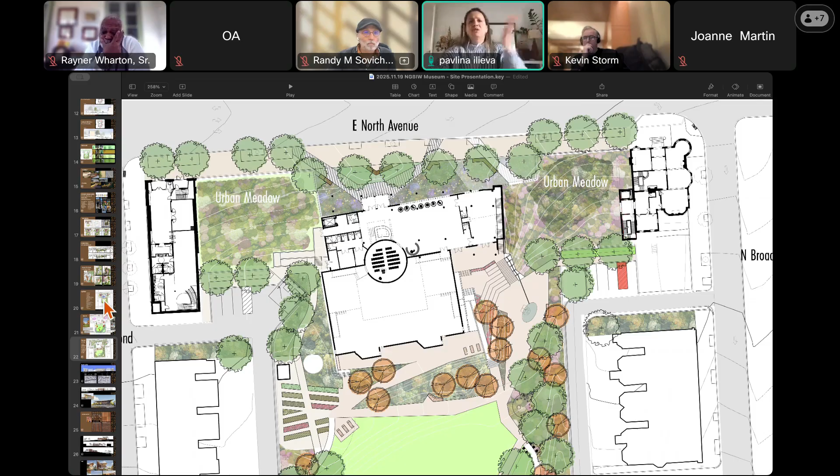And you have the opportunity to do it twice, once in a meadow setting and once with a much stronger urban edge. It just needs to be very intentional and very clear, not random. It can't just be that these shapes look cool and dynamic. It can be a circle, but you decided it would be an angular shape. Either one would work for me, as long as it really connects significant pieces or has some kind of pathfinding, wayfinding, hierarchy-building part to it.

So that's really the extent of my comments on the site and overall approach. I unfortunately can't provide much comment on the building, since I don't think there's enough information presented. Right now there's a two-story volume and a one-story volume, and this really intriguing outdoor balcony and deck, which I think is a great feature of the design. But there's just not much else to comment on.

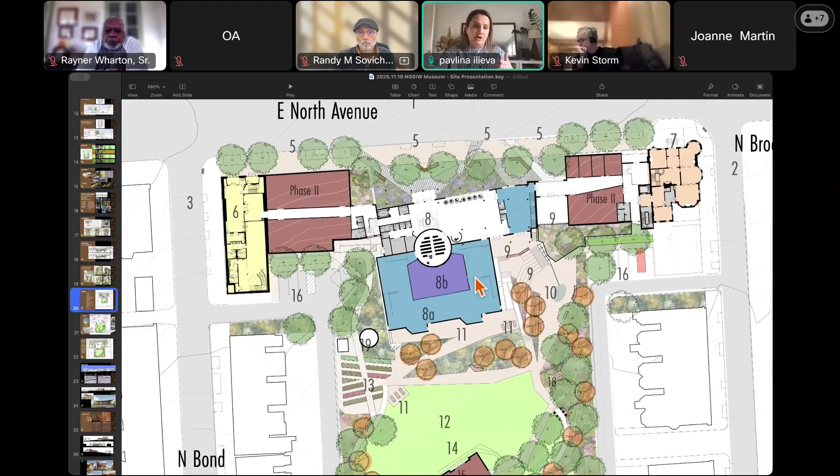There was a slide with the materiality, which looked very interesting and exciting. It's just hard to understand how one really experiences or understands the building. The elevations aren't necessarily that helpful, they're sort of flat drawings of what in this case is a more dynamic building.

One thing I'd mention is that in some of the renders, the back facade, the one at the overlook, appears very solid, very tall, and very opaque. It seems like from this entire landscape you're going to have views back into the building. I wonder if you can use that as an opportunity, even if you don't get more glazing in it, because it doesn't quite work with an exhibit environment, to make that wall continue the storytelling and introduce another element to it.

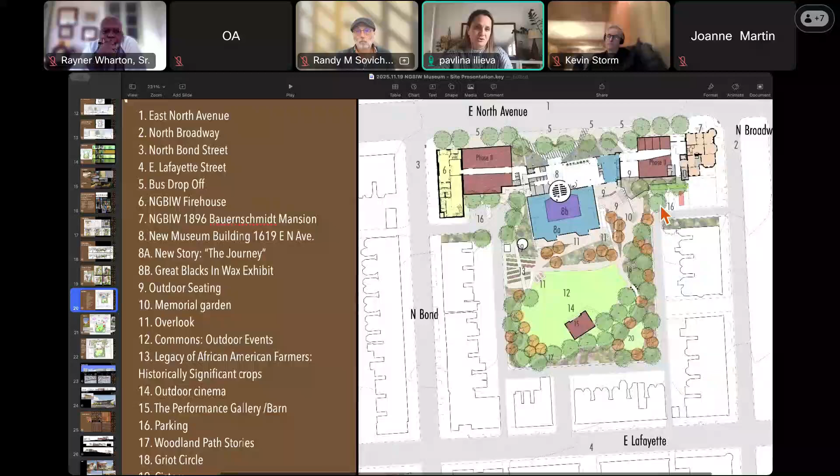In general, to the extent the exhibit space can allow it, opening views into the garden from those spaces would be really wonderful, because you're doing a lot to create this environment in the back portion of the site. Even if it's not announced in a grandiose way, so it doesn't distract from the exhibit, I wonder if there's a way to allow for carefully crafted previews, so people think, oh, I want to go there after this. Really let this interior-exterior kind of experience and connection to the natural environment play out as part of your initial strategy.

Right now there's a very hard edge between building and landscape, in the front and in the back. That's the extent of my comments.

I'd like to offer Kevin Storm the opportunity to share his comments as well. Kevin, what are your thoughts on the project?

Thanks. I think it was clear from some of my questions, I was already conveying some of my comments. It was a bit of a blend, and Pavlina, you just articulated much more clearly where I was beginning to hint at with the North Avenue orientation of the building, what was troubling me. I realized there's very much an arbitrariness to it. This isn't necessarily saying you should be layering your phasing in a way that's more efficient, but there is something, when I look at the plan, an interesting thought experiment about what if the main new building attached to one side or the other.

Have redundant elevators and stairs, you probably have staffing inefficiencies. Instead of having two evenly sized urban meadows, you have a larger space that you can treat in a much more intentional way. Maybe that intentional way, taking what Pavlina said one step further, is what if that's a place you can actually activate.

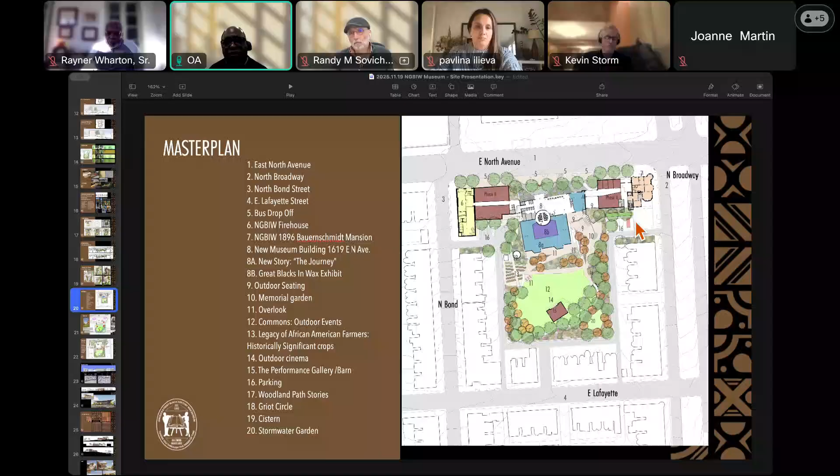And that kind of overlook area, I love that area. But I'm disappointed in terms of how it's handled related to the building. There's got to be some way some portions of the exhibits can be viewed from that overlook area.

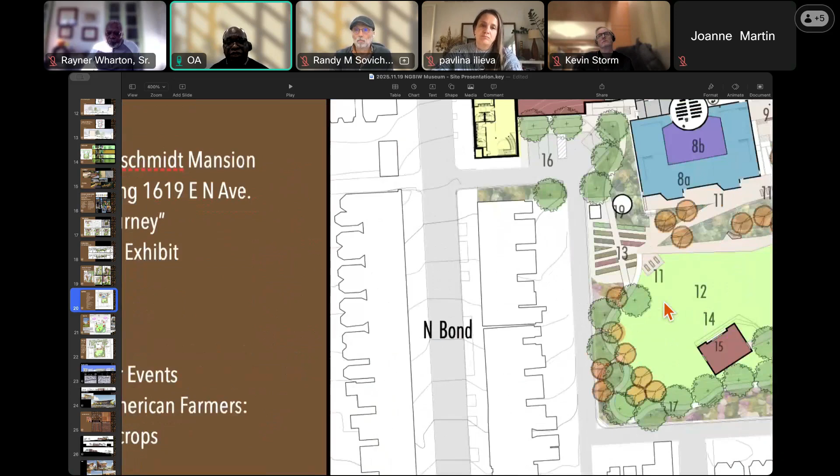So that overlook area, to me, you need to leverage that to do double duty in terms of allowing folks to come to that area and not only experience what's happening in the barn and everything else, but certainly a more deliberate and intentional relationship to what's happening on the inside. Perhaps a portion of what's happening on the inside needs to open out onto that area.

I'm imagining it's terraced, I think I saw it being terraced, which I like. But it should also serve as an area where you can kind of come out, pause, and look towards the barn, etc.

And maybe the amphitheater should be somewhere in that location. You see what I'm getting at? I know it seems as though you're trying to capitalize on this sort of circuitous procession, but sometimes certain features belong in very discrete, very specific areas.

And if the barn is meant to be having shows, maybe it's not. Maybe it's just a location where artists have the ability to express certain things there. I don't know, but the fact is you've got this huge lawn area. Maybe that's another feature that should be considered.

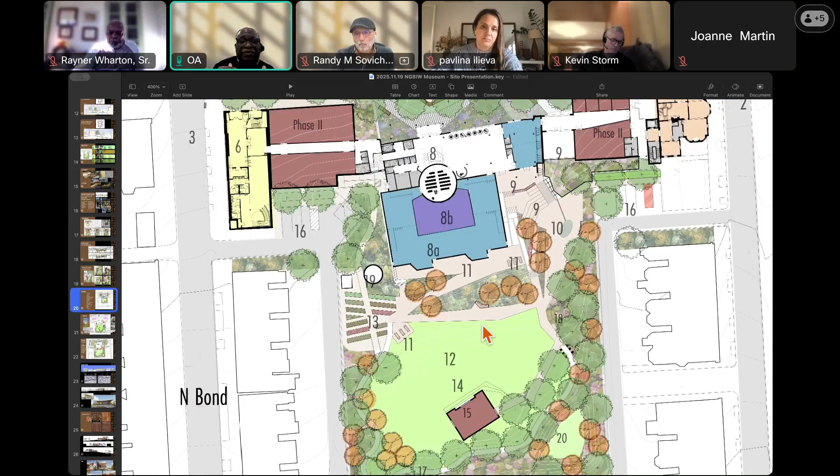And that's where perhaps this kind of amphitheater becomes nothing more than just a terrace seating area where folks can sit informally or in a formal manner and experience anything that's occurring on the lawn. It can be people watching, it can be conversation, it could be something as important as a story being told.

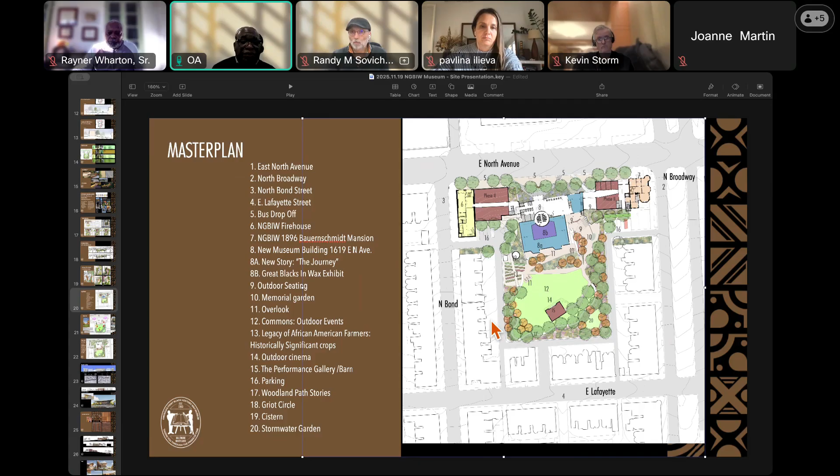So I think these are the things you've got to go back and refine. But all of this really begins with how that building sits on the site, and I think there are better opportunities to take advantage of that. You've talked about biophilic design, and what better way to do that than really trying to integrate more of what's on the outside into the building itself.

The other challenge is, we know the program here is all about Blacks in Wax, but the main exhibit area, I'm not getting or seeing any architectural or design features that begin to tell me how you house that exhibit. There's an importance associated with that, and I don't believe it's coming out here in the design. Good, and maybe it is there, maybe you've thought about it, maybe you have ways of expressing that. But it's not very clear to me how that's being achieved.

And then finally, the architecture of the building. If you can go to maybe the North Avenue facade or one of the three-dimensional views, I must commend you—the form here is very engaging. It's bold.

I don't know if the intent was to consider something that has some kind of a historical pretext, or something that's reflective of the heritage and culture, African American culture. I don't know, but the point is, it's a very bold form, and it's engaging to the extent where it could be very provocative on the imagination, right?

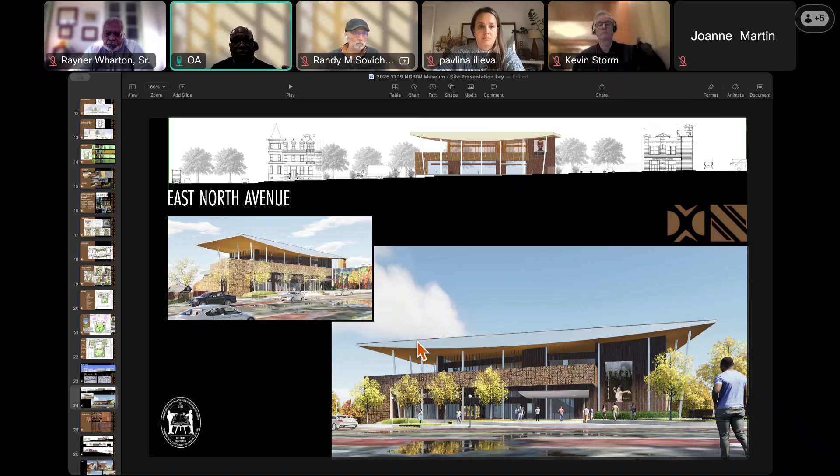In addition to that, the backside is all blank. There's not much in the way of openings, certainly at the ground floor. And then I understand the upper floor is the Maryland room. But based on this image and a few others I saw as you went through the slides, it seems to me that everything to the west, to the right on the screen, would have the ability to connect at multiple levels, whereas everything towards the mansion connects only at the lower levels. So I'm imagining that's kind of the intent.

But nonetheless, the architecture is what it is. You've selected a certain kind of materials, a certain kind of expression, the roof structure. Just be careful though, and I'm saying this not in a critical manner, but in a cautious manner, because images do matter. Just be a little bit careful, because as you work through the articulation of this main structure, it potentially runs the risk of looking similar to the types of institutional facilities you see in the Delaware area, the Delaware Valley.

There are institutional facilities that serve like DOT and so forth, and they have this kind of connotation, or they convey this kind of imagery. So just be very careful of that, okay?

I think one of the things you may want to do is dig a little bit deeper into the heritage and culture of what the museum is expressing, and see if there's any language, not necessarily motifs, that you can reinterpret and better integrate into the massing and design of this facility, so you have the opportunity to make the expression unique to its purpose and unique to the site you're on.

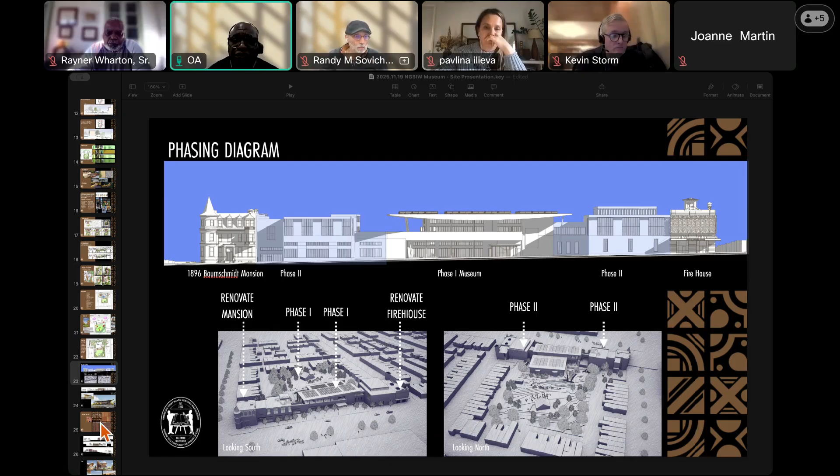There's some other kind of awkward moments I'm noticing in the facade. If you can go to the west-facing facade, there was an image—when you look at how the roof structure begins to shape itself and sit above the exhibit area, you're adopting a unique approach to the roof and how you deal with the fascia. It's not necessarily new, but it's unique in this application.

One consideration here is, as you look at that west facade, maybe the second block close to the back, look at how the glazing under the roof meets the brick there. Perhaps that needs to be dropped a little and shown as stepped, as opposed to how it's showing—it's neither here, neither aligned. You did reference certain datums that carry through, but I think that's only applying along the North Avenue facade. You need to pay attention to that as well on this west-facing facade.

And that little piece up at the top on the roof there, in the bottom image, I really don't know what it is, because as I track around the roof, I'm not even seeing how that's resolving itself. So I can only say these are things we would need to better understand.

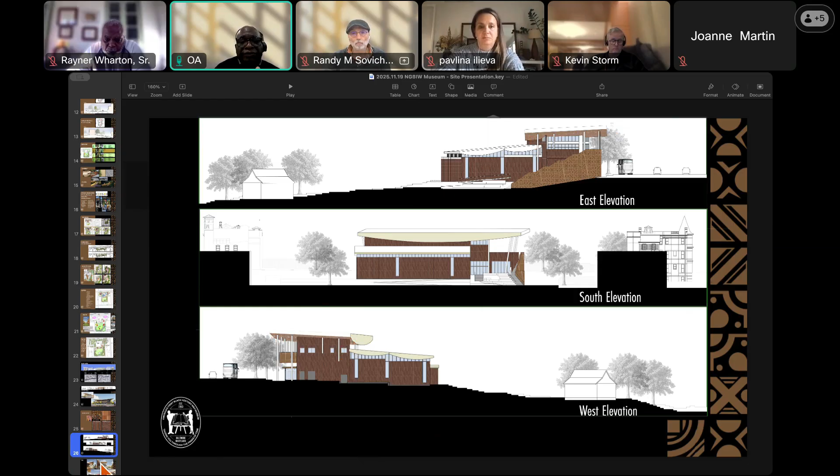On one hand, I think your material selection is interesting. There's a lot of earthy type materials here. Maybe that's a recall to some of the heritage associated with the purpose of the museum. I don't know, but it's not explained, so I can't really react to it much.

But again, my biggest challenge is how the building sits on the site, the ensuing outdoor spaces, and the need to better express what the actual purpose and exhibits of the museum are. I think you have the ability to do that by slightly tweaking the procession and how everything comes together as you come through the building and relate to the site.

But nonetheless, I'm excited about this project. I am African American, so there's a sensibility associated with the project, and I trust the design team can go back, reflect on this a bit more, and come back with a better organized set of graphics, and certainly a solution that's truly befitting of the heritage and the weight you have to carry and convey moving forward. Thank you.

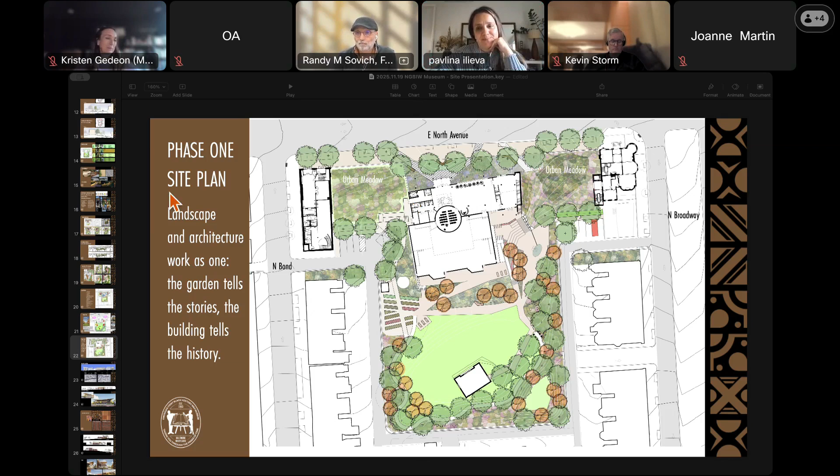Thank you. Thank you guys for taking notes, and we'll be forwarding the notes to the design team shortly. Thank you guys, have a good one. Have a good one, everyone. Okay, thank you, take care.